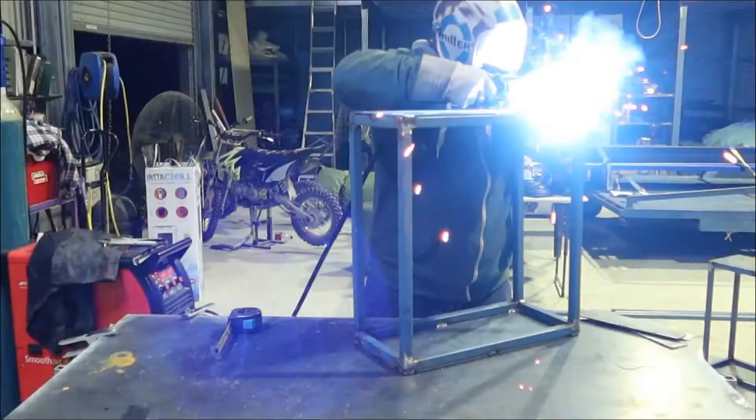Steel and Wheels. On this episode, I'm just going to show you some of the engineering side of things and what I've done to prepare to do this job and whatnot. What is the job, you ask? We are going to build the elevator. Some of you might call it a lift, some of you might call it a ground to the fucking roof, I don't know. That's what we're doing, the elevator.

There's been a lot of work back and forth between me and my engineer. Great mate, big shout out to Dino for helping me out there.

Yeah, it's been a lot of work going into it, so I'll give you a rundown of what we're doing, where it's going, some of the materials we've chosen, why we've chosen that to go that direction, the winch, how many kilos that is and why we can go that many kilos and how that operates and whatnot. And then in the next episode I'll try and get into a fair amount of detail as we build it to the next level to show you how it's built.

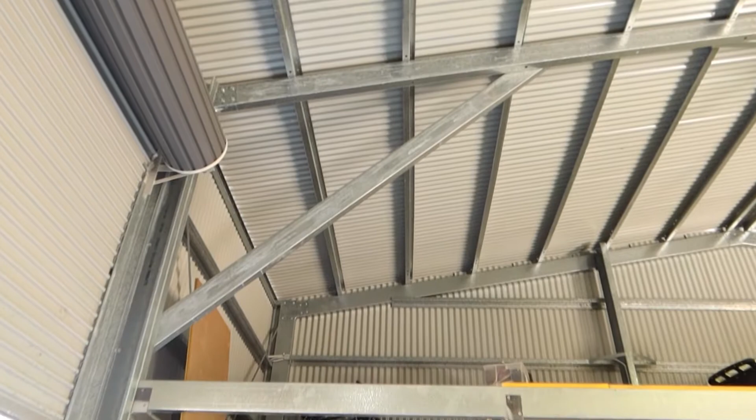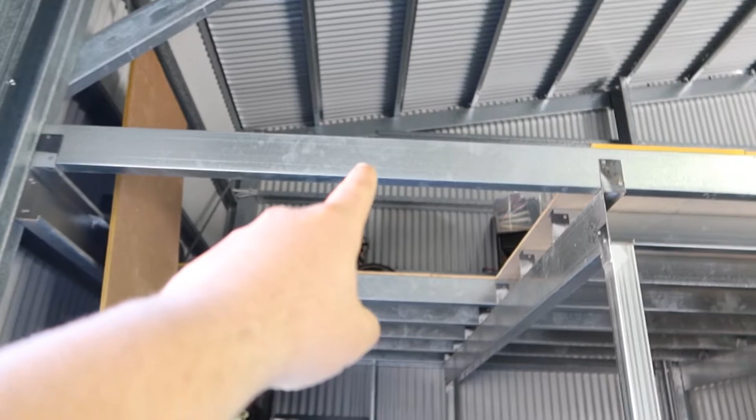Alright, so as a start, that's where it's going to go. In that hole. So when my old boy built the mezzanine floor, we left this hole out just to do this. So that's where it's going to go. We're going to cut that beam there out because we are going to try and build a lift on the floor there. Basically because that's to the roof.

From memory, I think it's 4,700 or 4,800. Might be 4,800 to the roof there, and then to the roof there is like 50. Sorry, no, that's 51 and that's 54. But we're now going to build it so it's lower than that piece right there, so that we can actually sort of like scoop it up and in. Bit of a scoop up and in job. So now she's 47, 90 or something, and 51 underneath that beam.

That beam will get taken out, we'll move it to this side. So basically we'll just do a flip flop and then attach back to this piece here, out here. That piece will get removed. I'm not sure if I'm gonna put it back. So yeah, that's basically where it's gonna go, how that's gonna work. So we'll just get it over to here somehow and just straight in the hole. That's the plan. I bet you it doesn't work out like that, but that's the plan.

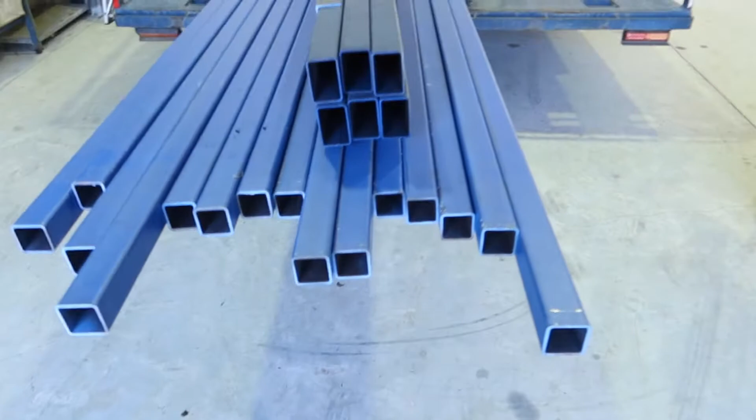So this is material. This is all 50 by 50 by 3 mil. There's a few lengths there because half of it is for a different project. The 75 by 50. Now that's because the uprights have to be 75 by 50. So up and downs. And then also the top piece that runs this way has to be 75 by 50. The one that goes that way will only be 50 by 50, but this one has to be 75 by 50. And then also where my winch mounts on top of it all has to be 75 by 50 with a 6mm sheet on top to cradle the winch. So that should be good, that should be okay.

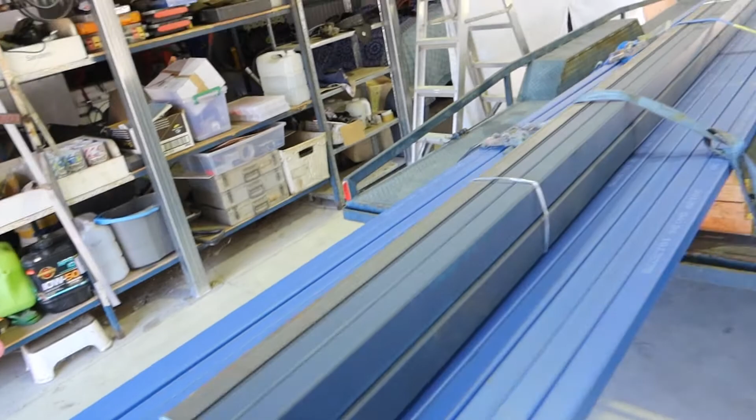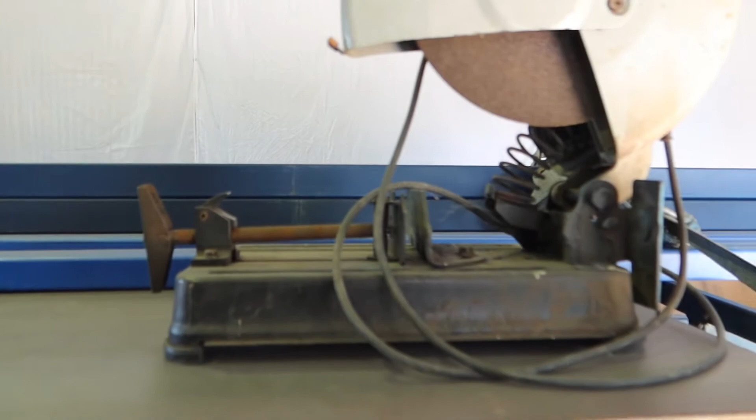I did intend on trying to get a cold saw. For you who don't know, the cold saw runs like, I don't think it's a carbon blade or a tungsten blade, but it's not like a grinding blade itself, it's actually a cutting blade. So it looks very similar to your tungsten carbide cutting blades or whatever they're actually called, big teethy kind of thing, but yeah, my budget just doesn't allow for that, so we're gonna use a drop saw, which will liven things up a little bit because angles are critical.

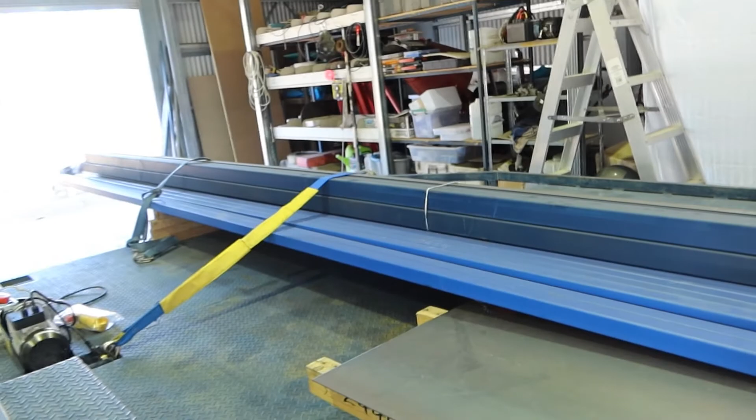Just for any peace of mind for you guys to understand now, for every degree that I'm out once I weld this, from bottom to top could be upwards of 80 mil out of square. So it's really critical that I spend a lot of time making sure it is square to the degree. The squarer it is, the better we're gonna be.

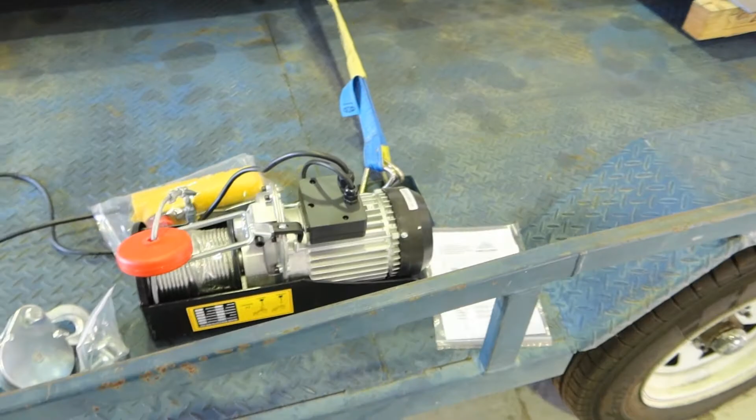Alright, so this is a little winch, 800 kilo winch. To get 800 kilos, I don't know if you can actually see it on here. So if you get 400, it's just a single strand. If you get the 800, you've got to double it back over.

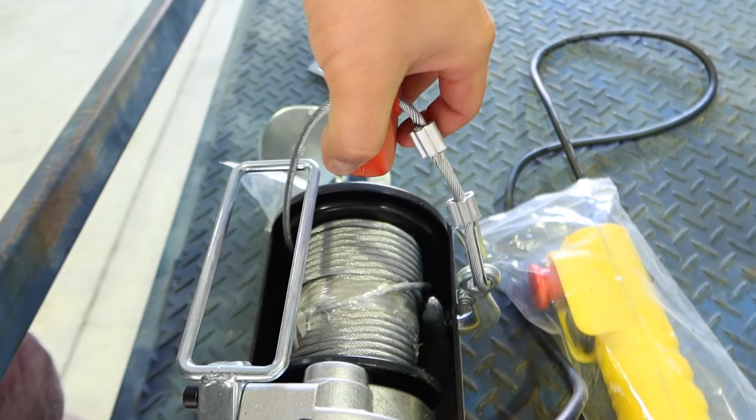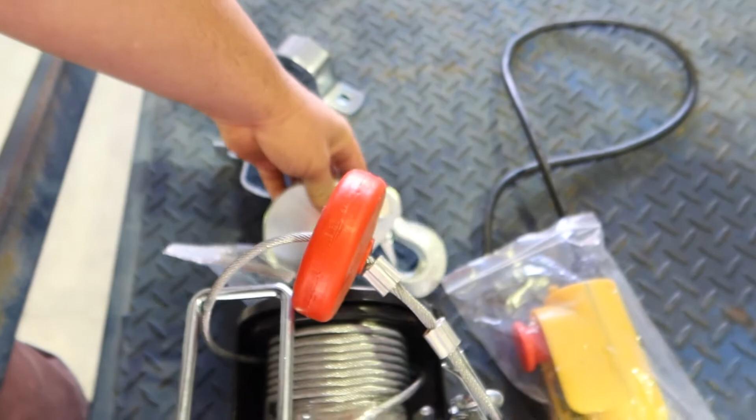So basically like that. Reattached it there. So now here we'll just run on this hook here. That'll basically go in there. Another run on that. These are the traditional mounting points, but we're doing away with that. We are going to mount it directly off of its 4 mounting points underneath here.

So I'm just going to put like the piece of 6mm flat on the top, and then this will bolt to that. So that should be fine.

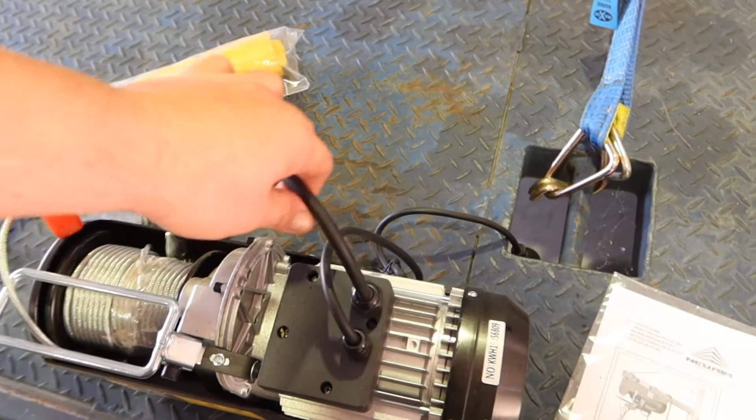We have to extend this extension lead, so I'll probably run it all the way back, disconnect it, this one right here. I'll probably pull the electrical box off the motor, undo all this, undo it out of there. I bought just a cheap extension lead to come in here and annihilate all that. So that should be good, should be easy enough.

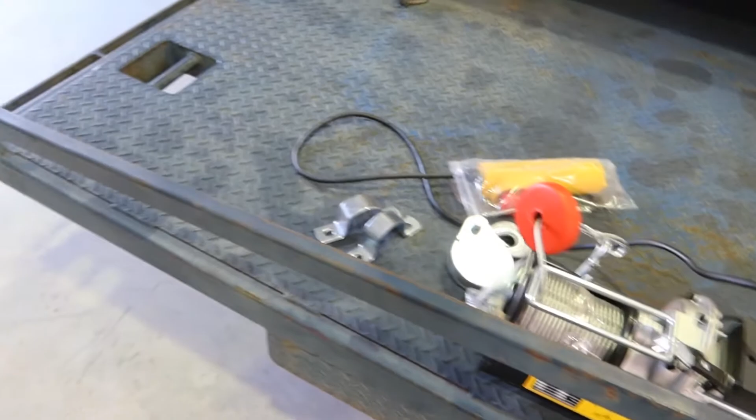We got extension leads because the nearest power for me is over there beside the fridge. That's the nearest power, so it'll have to go up that wall to there, across and then out to roughly there, somewhere there. So yeah, that's pretty much the thing. The only thing we've got to get things up there at the moment is this. Doesn't cut it, trust me. It's just not as good as it could be.

Alright, what I'm going to do now is we'll go to the computer and I'll just do voiceovers, actually show you. And then my engineer's done some voiceover for you as well. We'll show you how the engineers work their stuff out. So there's going to be drawings where you basically see maybe half of it and then the whole thing, and then there's points of where it shows you the stress and how they show you the stress.

So this project will come out, the whole thing's rated to 1,000 kilos, but the winch itself is only 800 kilos. The price difference is phenomenal, and I don't feel like I want anything that heavy up there anyway. So the frame and that are rated to 1,000 kilos, the winch 800 kilos,

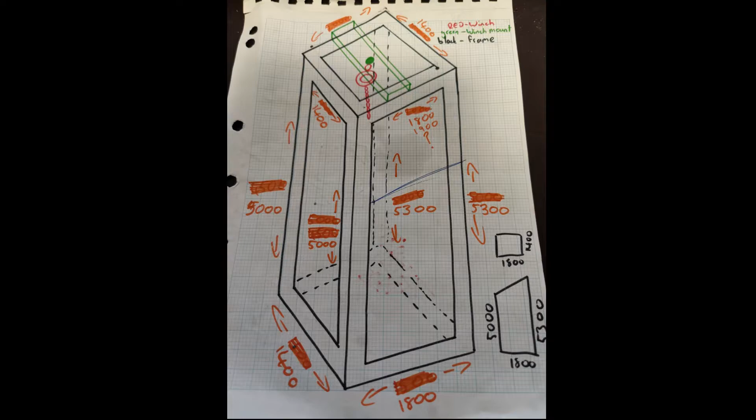Basically, the red bit at the top is the winch, the green is where the winch will connect, the black uprights are of course the uprights, the base and the top, and then all the orange is just the lengths that we thought it was going to be, and it didn't end up being them, but that's the rough drawing of where it all started, and we went from there.

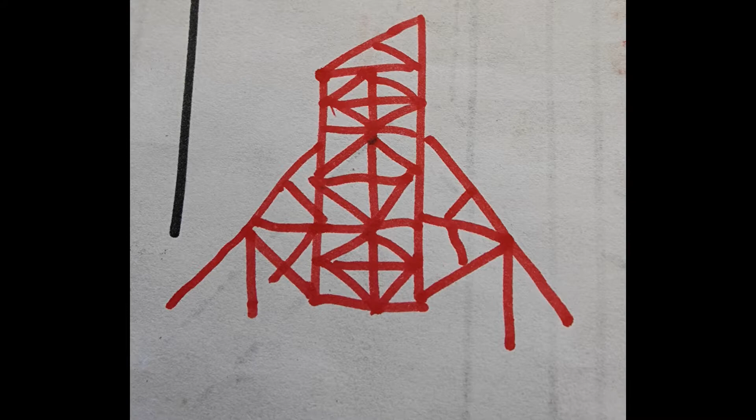Now, I thought this one was pretty funny, so I thought I'd just add it in for you guys. This was Luffy's interpretation of how an engineer would probably design this in his mind. Normally, when you meet a lot of engineers, they love to heavily over-engineer everything. So basically, the middle section is all the uprights, and then you got the floor and the top, and then just gussets and braces coming out from every direction possible. I thought I'd show you that because I thought you might think it's a bit funny, as we did. So I hope you enjoyed that, guys.

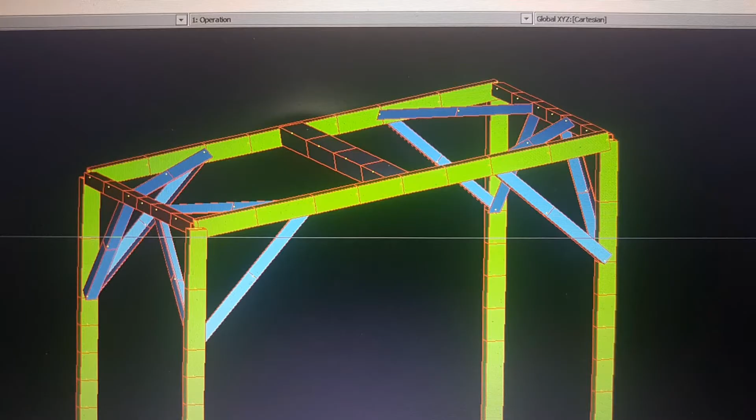Alright, guys, so this is basically some drawings of the lift in its 3D form. The blue is gussets, green is bar work. The middle section is where the lift will be mounted. The green is also 75 by 50. The purple is two pieces of 75 by 50. The red is 50 by 50. And the blue is 50 by 50 angle.

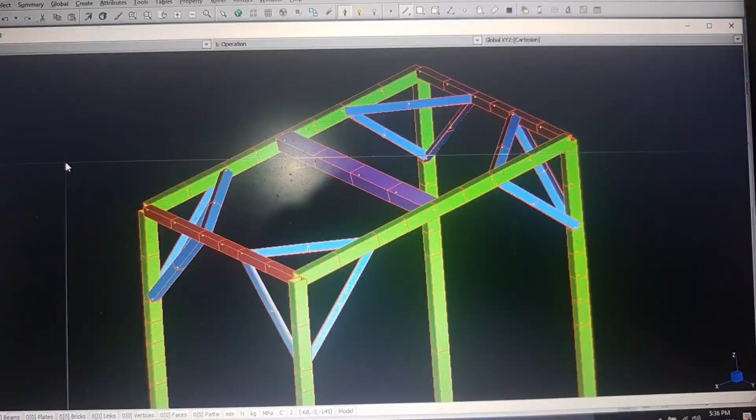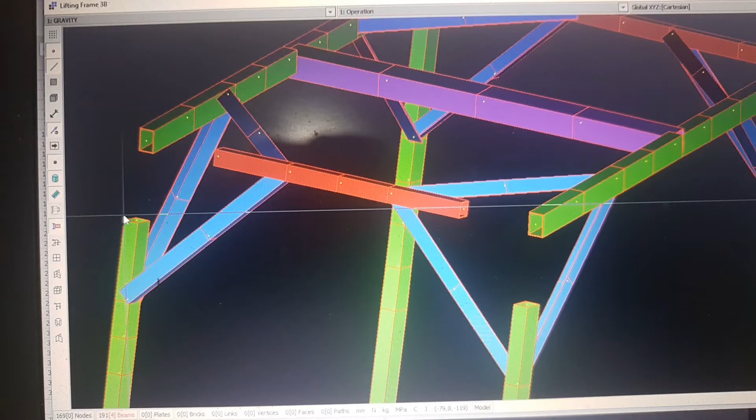So these are all just different views of the frame itself and how the frame is designed by the engineer Dino. So as you can see, the bottom is all 50 by 50, basically because it takes no structural support. It's basically just a resting point for everything. This is just another view again from a different angle of it. So everything's got angles to gussets. This is a cut apart, so you can sort of see it in different sections and help you understand it from a different point of view or how it may work. That's basically how they're going to sit, so they'll overlap. One side will overlap and then one side won't. Just another cutaway.

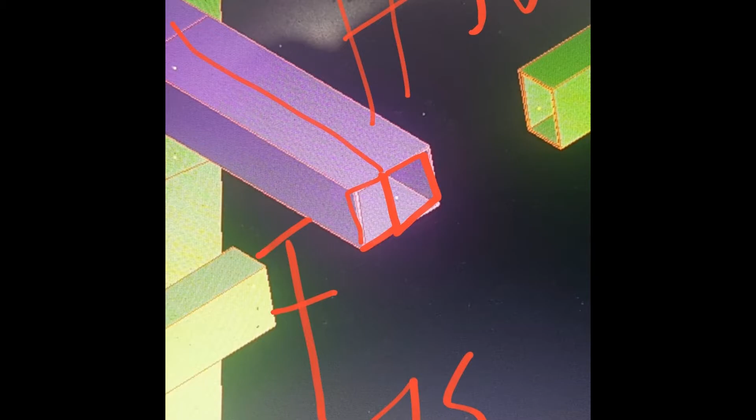That's where it's all going to meet for the winch, but we've changed that design slightly. As you can see in this image, we've reshaped it so that it's two pieces of 75, not one. This is just a full image of what the actual lift is going to look like in its complete form. It has had a few minor adjustments since this image was drawn, but that's basically what she's going to look like when she's finished.

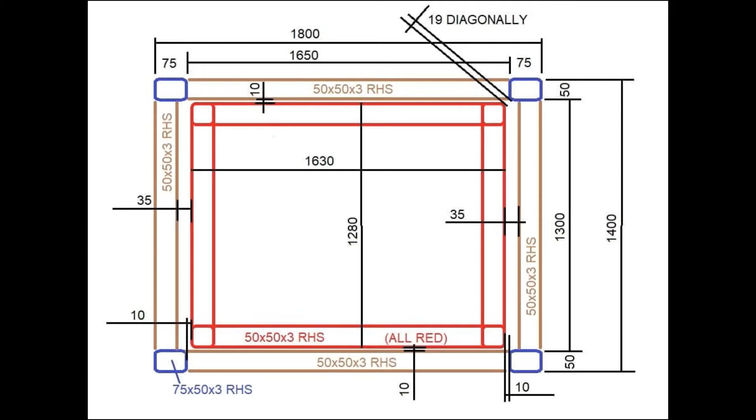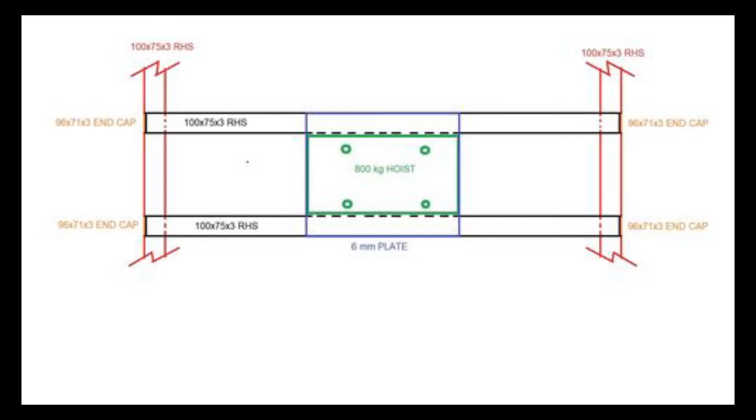Alright guys, so that's an overall view of the build, but looking straight down on it. Gives you some dimensions and roughly what it's going to shape out. That's the two-dimensional sort of drawing that I can build it off of with everything that's going in there. This is for where the winch is going to mount and how that's gonna come about. This image will help you see it a little bit better. So the winch is in the middle, two pieces RHS down each side, flat plate across the top, and some bolts, hook it up, no problem. The red piece of RHS on the right hand side is essentially the roof or the top of the lift and where the whole winch cradle bit will mount on top of.

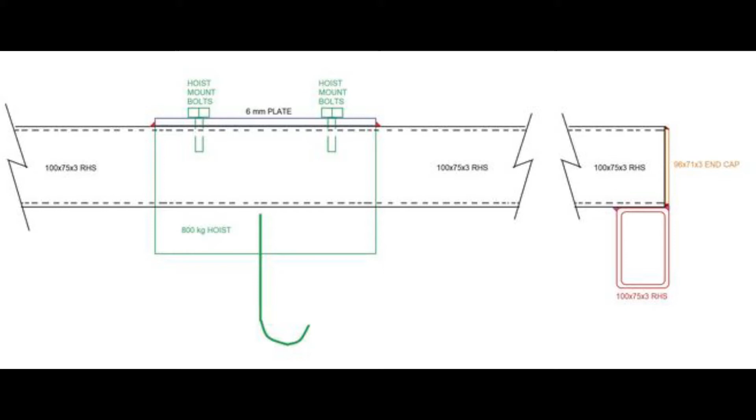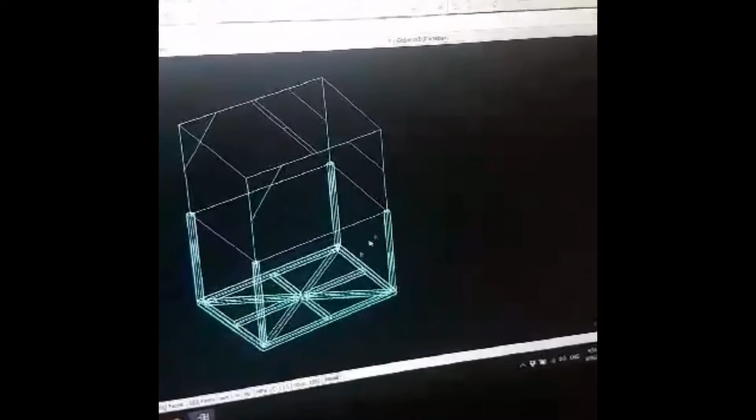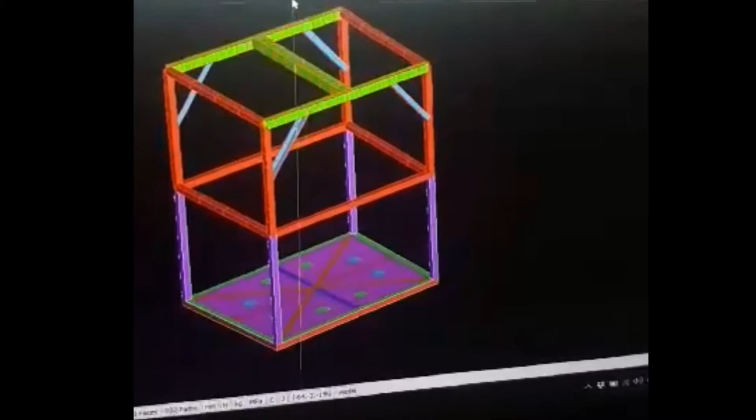So that's in line form. So you can see there's the two RHSs side by side, just there. I've just put a join between them representing the lifting lug. And then your braces, your angle braces, and then your 50 by 50 uprights, 50 by 50 there, and all those are 50 by 50 as well. So the red is 50 by 50 there, and then the green is 75 by 50, and that's the double 75 by 50. Now they can be spaced apart, so we can talk about how we can reduce your head height, because you've got a fair amount of gap between your hook and your hoist and then your top beam.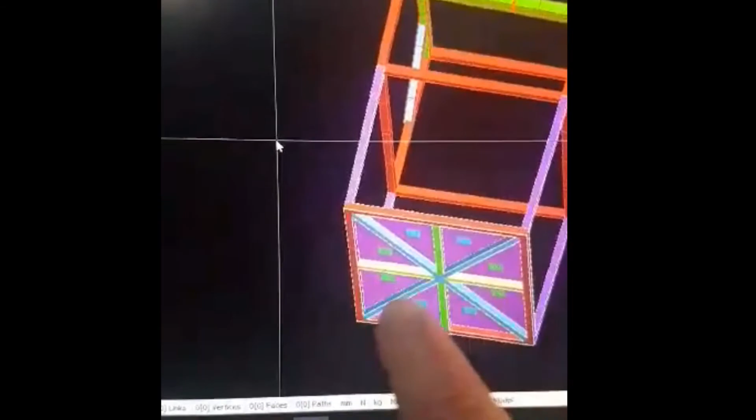This is it rendering from the underside, so it's looking underneath. So yeah, you have the double cross like that, and 2.5mm or 3mm plate, and then your uprights, and then your waist rail, and more uprights.

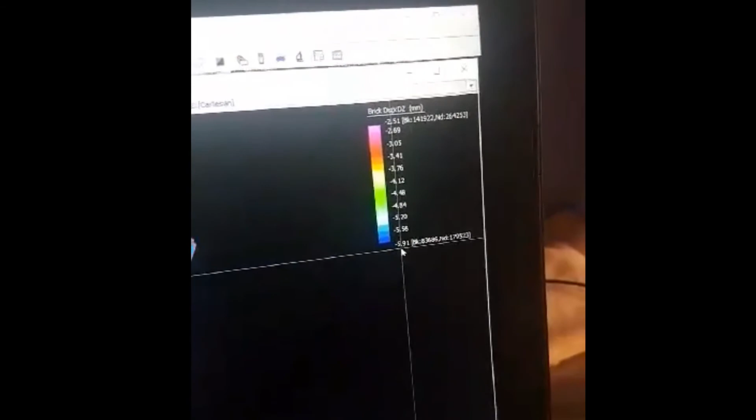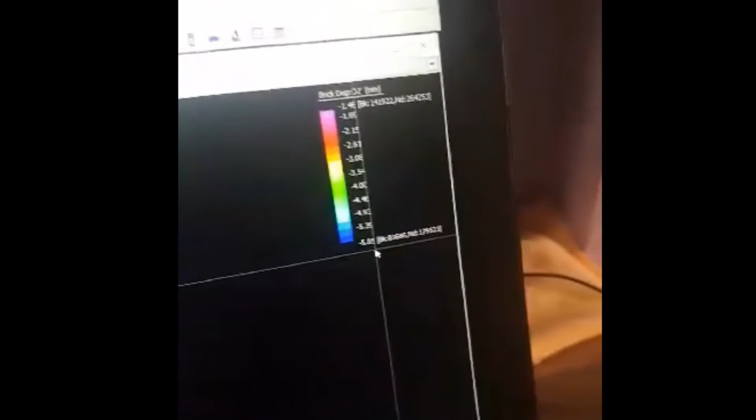And this is the results view and displacement. The four people standing with both feet on the ground, and that blue represents 6mm displacement, but the corners are basically 2.5mm, so it's actually 3.5mm total from there to there, so you will feel about 3. And this is four guys all standing on 1 foot, and you can see the deflection is basically the same, 6mm. So it's a 4mm deflection, so it changes from 3mm to 4mm, from 1 foot to 2 foot, so you won't notice the difference. So yeah, it's really well balanced. Total displacement 6mm, so that's nothing.

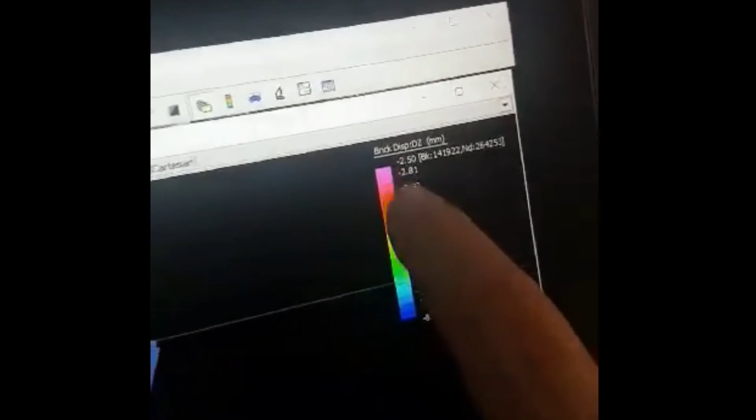And this is like that instant, if you jerk the hoist, total deflection is 8mm, so it means that the distance from there to there, or your foot, is 8mm, but from there to there is 3mm, which is exactly what you want. So that's all. Everyone's standing on 1 foot and then bang on the hoist.

Hey guys, and thanks for watching. Tune in on the next episode as we start the build, and we'll see how we go. Hopefully it all fits in place and nothing goes catastrophically wrong.